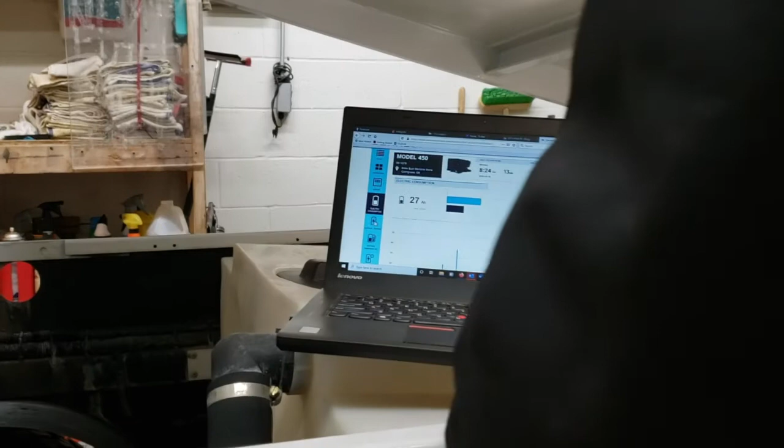Today we are going to be talking about Zamboni Connect. It's something that the Zamboni company came out with about 3 years ago and has captured the attention of a lot of rink personnel with what it can do for them to make their life easier by utilizing it, giving them the ability to be off-site and yet still monitor how things are going with the machine's performance and operation. Zamboni Connect delivers data collected using sensors on your machine to a mobile and web-based application that displays and stores the information. Built for ease of use and to allow management insight into daily activities as well as historic data. Monitor trends and activity.

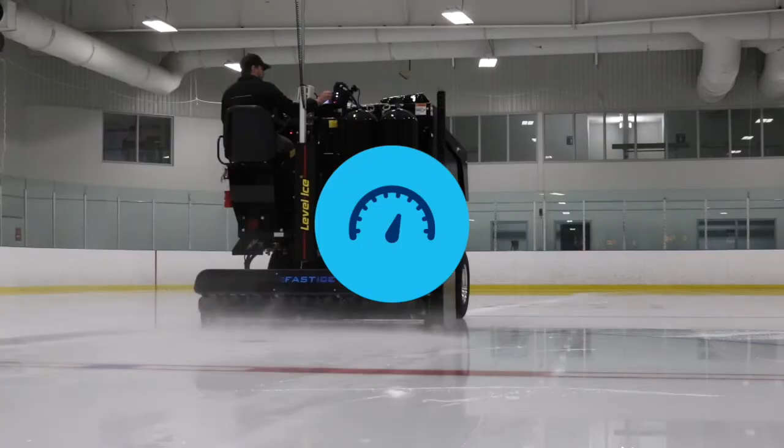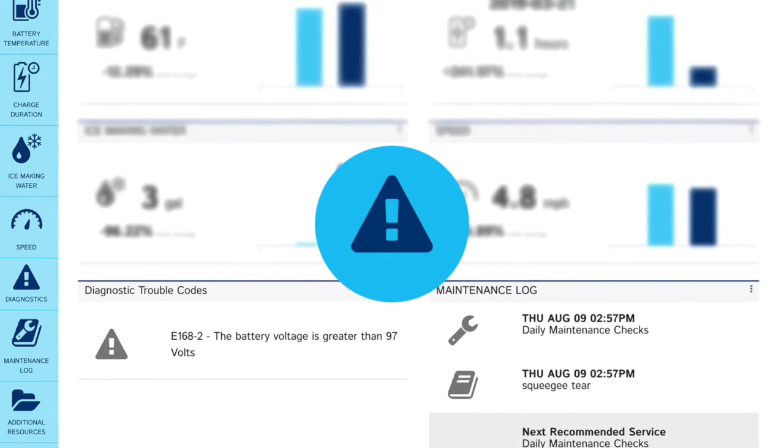Ice making water use. Speed. Maintenance activities. Energy consumption and battery performance of electric powered machines. Fuel consumption and engine performance of fuel powered machines. Diagnostic trouble codes via online or mobile alerts.

Zamboni Connect lets you listen to your machine. It provides a place for your team to collaborate. Let's rejoin the conversation with our team describing how the Zamboni Connect system is helping facilities with new access to data and training tools to optimize your machine's performance and longevity.

When my dad was working for the North Stars 100 years ago when I was young, they didn't have the technology that we have today that might have, if it was available back then, enabled him to not have to spend as much time in the building. He would have been able to monitor things like the refrigeration system, different aspects of the building, and the ice resurfacer. And that's really what Zamboni Connect does.

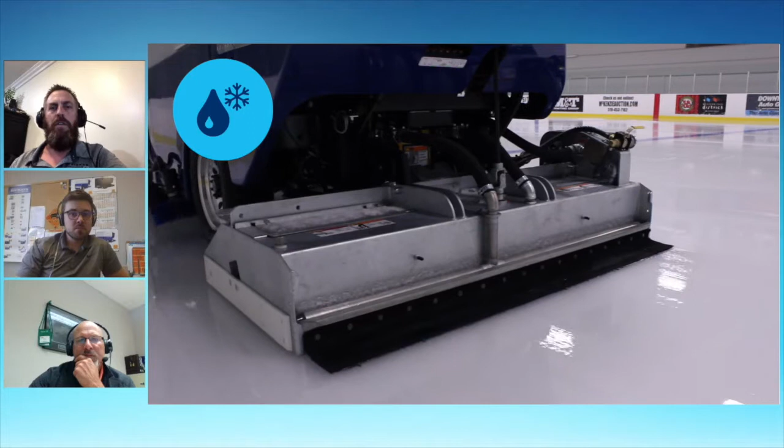I talk to our customers and let them know that they can be sitting at their cabin, as they refer to it in Minnesota, or the cottage up in Canada, and sit on their deck and have a barley pop and be able to tap in and see how things are going with the machine. They can see how many gallons of water got put down the last resurface, how much time they spent out on the ice, how fast they were driving.

And one thing that I've got from you, and I don't know if you want to expand on that a bit, is the training aspect of it. That's something I hadn't thought about when I initially started promoting this product to customers, but I think Matt, in his conversation with us, talked about how they did that with training their operators with the Connect product.

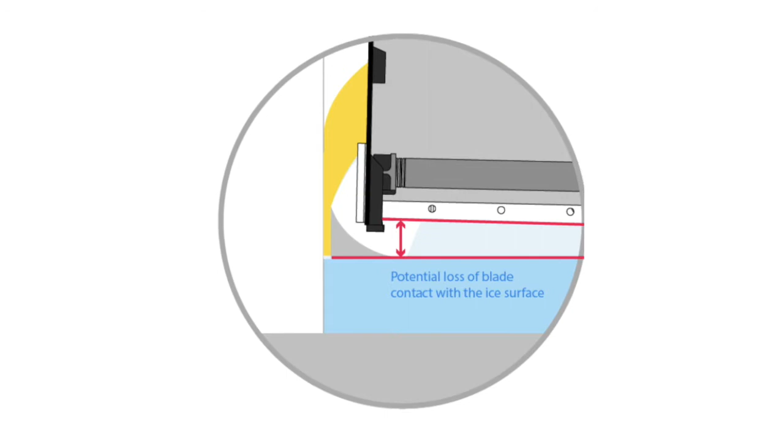Yeah, and that is one of the big selling features of the system, because you go into rinks, you and Scott, you guys know this. You walk into a rink and you see the bowl effect, and you're going, okay. And this would be on a Monday. In most cases, the experienced operators usually work days during the week, and the part-time operators are working on weekends that don't have enough seat time. So it allows, without pointing fingers, the system allows management to understand, okay, who's been on the machine, and let's take a look at one category.

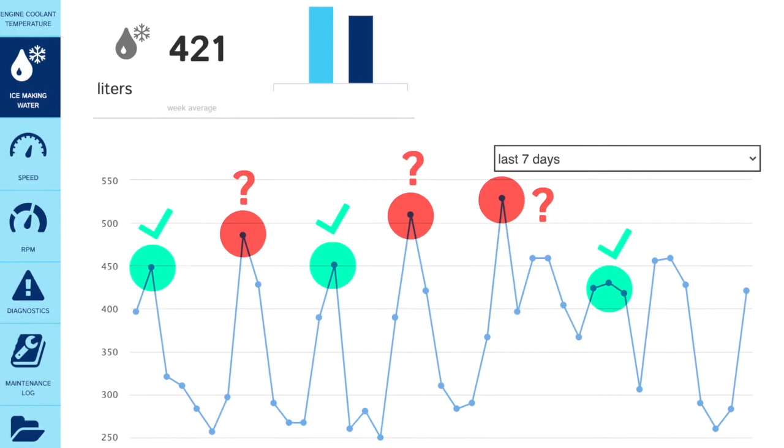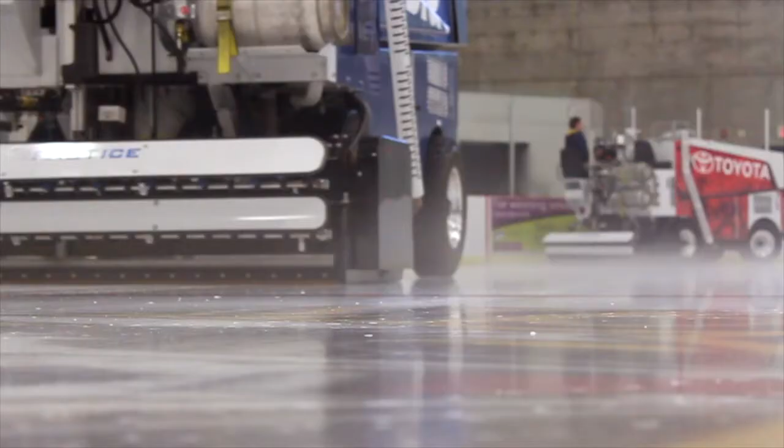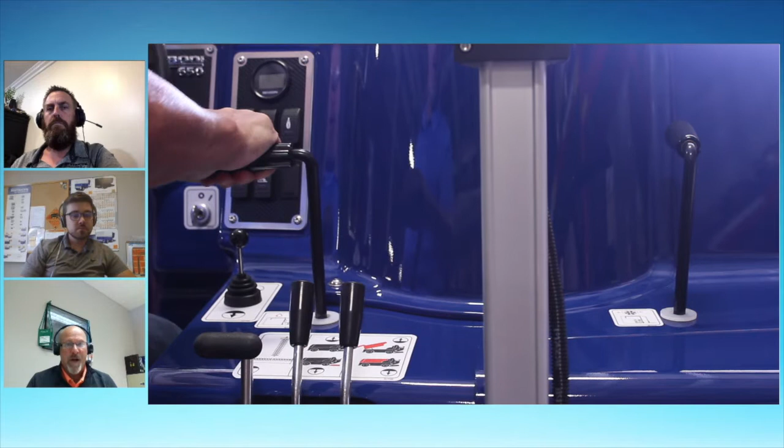Let's take a look at the floodwater usage. If they're doing a 7-minute flood and they're putting out 180 gallons based on the machine, well, something's not right. There's a disconnect there, and that's a training issue. Most times, I'm looking at floodwater usage, and it's always high, unless they're building their ice for an event or something, I get it. But when I'm training operators out in the field, at a single pad, maintaining 1.25 inches of ice, you only need to fill your floodwater tank up halfway and open up your valve halfway, and you're maintaining what you're cutting. And so it's a great training tool. And management, they look at that and they're going, wow, that answers a lot of questions.

And the operators, they'll go, well, Big Brother's watching me. No, Big Brother's not watching you. What we're doing is trying to make you better at what you want to do and what you are doing.

Yeah, I think it kind of goes to pretty much anybody can be a driver, but not everybody can be an ice maker. And I think this tool really helps the people who want to perfect their craft and know what they're doing. And the younger generation, like you, Scott, are into this technology and something that you guys are all used to. So maybe you can let us know what you see or hear from your age bracket.

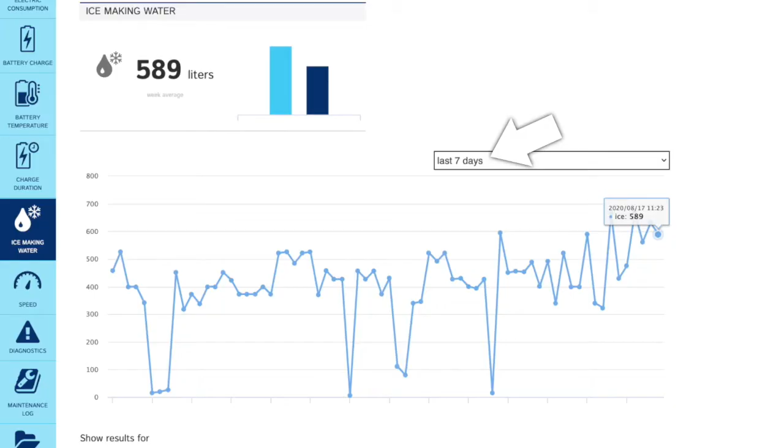For training, it's really beneficial to show operators data or a visual graph of how much water they're using. If you just tell someone to lay less water, maybe they'll turn it down a quarter or a half, but maybe that's still too much water, or not enough for a good flood, especially on weekends when the bowl can build up. They can look at the data and incorporate that into their training.

For staff and management, they're able to see, based on flood time, who is driving the machine, and if that particular staff member might need more training, or maybe they're not listening to the training. Having the visual data can show them, this is what we're doing, this is what some of your other coworkers are doing.

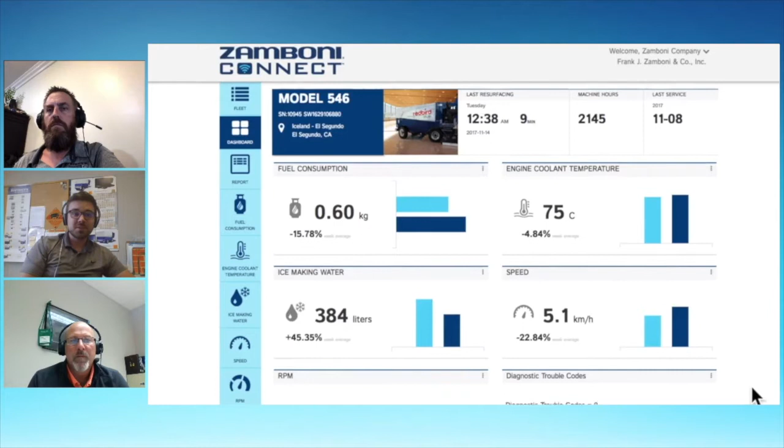It builds into the facility's bond of making a good sheet of ice. Doug and Marty could work the weekdays, while others work weekends, Friday nights, putting down all kinds of water in the corners, and then the weekday crew has to cut those corners down Monday morning. But if we could see the data, like, this is what these experienced guys are doing, I'd want to operate the machine like them, I'd have a visual representation of what to strive for to make the best quality sheet of ice.

Down here in the States, depending on the part of the country, you can have a hockey association that runs the rink, and parents of the kids using the facility have to donate time, and some of those end up being operators of the machine. They might drive it only 2-3 times a month, and this tool is really going to help them.

It's another selling point I bring to people. If you've got 10 drivers, which might be light for some facilities or too many for others, and 8 of them are doing the pace and flood amount you want, but 2 aren't, you can bring it to their attention and say, hey, this is what we're trying to achieve.

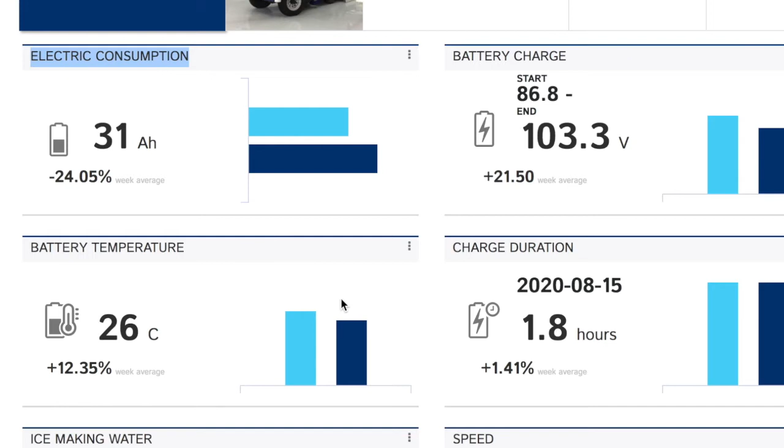I'd think, Scotty, with guys your age group, they might be so in tune with technology that when they come off the ice, they want to back up what they believe, saying, hey, I did a good job on the ice, let me check, and they can check the data from Connect to see if it verifies what they believe or not.

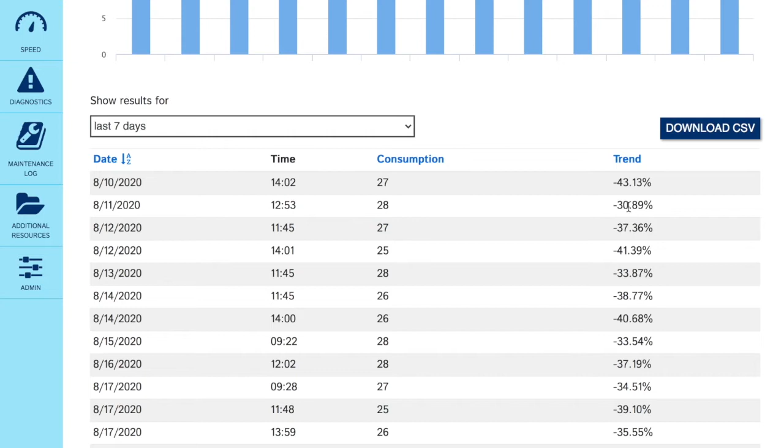Just to take it a step further, I'll give you a real life situation back here in Ontario. A customer with Zamboni Connect reached out to me last year complaining that their ice was wavy. So troubleshooting with them - dull blades, down pressure, checking all that - everything was great. Then I asked, is this all the time? He said, no, it's just on weekends. We come in Monday and we've got wavy ice.

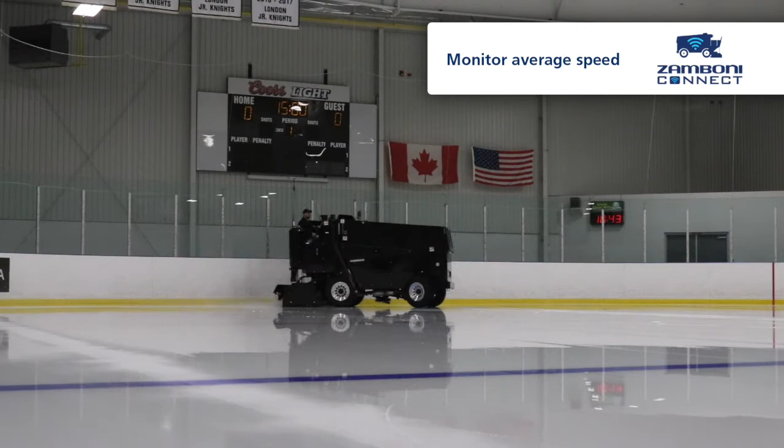So I checked the machine, and the operator working that weekend - not every weekend - was doing a 5-minute flood. If you're doing a 5-minute flood, you're probably going about 8 miles an hour, when the average speed should be about 5 to have the machine do the proper cut. If you're going too fast, you could end up with wavy ice.

So we identified that operator, and it makes sense given they're busy dealing with dressing rooms and customer service and all that. So we reached out to the operator with the manager and said, just showing you this and letting you be aware of what's going on and the effects of driving too fast, what's happening to the ice.

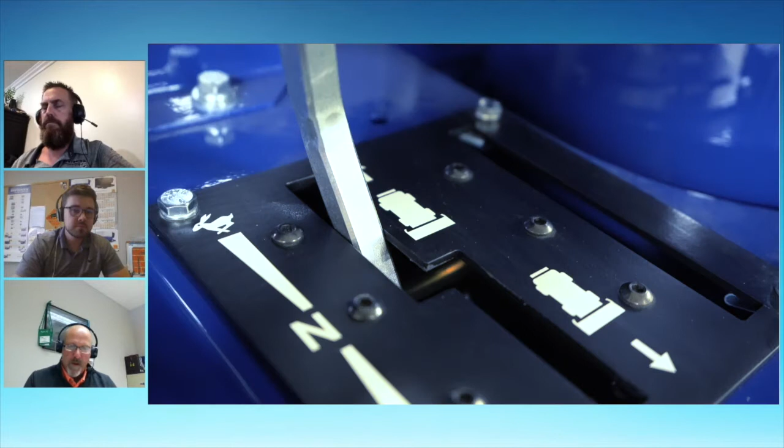That's about 5 miles an hour average, and he drove that speed the whole time. Perfect sheet of ice. There you go.

Not having Zamboni Connect, not being able to identify issues, they could have gotten into expenses of fulcrum arms and all bushings and all those different things that a lot of times are the case. But we just identified, because of Zamboni Connect, one operator that was driving 8.5, 9 miles an hour. So it was a definite benefit.

One other thing you were mentioning is having the immediate feedback of knowing, Doug, you could say Scott, turn down your water, and maybe you're outside the building and I'm like, okay, maybe I'll turn the handle down this much, but what does that equate to? How many gallons less am I putting down?

So by looking at my floods, I'm able to determine that if I turn it a quarter, I'm using, let's say, 50 gallons less. Or let's say I'm filling the hot water tank all the way to the top and I'm only ending up using half of the water by the end of it. By the next time I'm doing my next flood, that hot water is now cooled and it's not going to lay the best sheet of ice.

So using the data, you get immediate feedback and really start to see the importance of resource management. If I'm heating water to make ice and then just dumping half of it down, I'm able to see how many gallons of water, or make a quick math equation, but it's very quick to see how much money you can save with proper training and understanding what the machine does. Just the visual of the data and the immediate feedback is a great help, because you can tell me drive slower, how slow, use less water, how much less water.

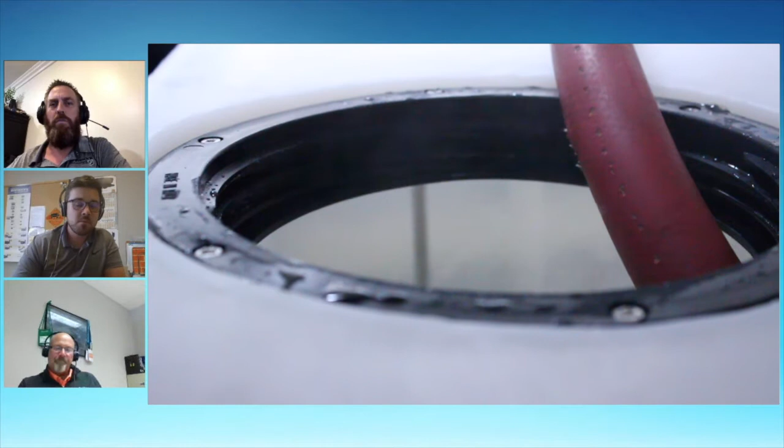Yeah, almost a science. And I think one of the things, if I recall correctly, or maybe it wasn't the guys at Ice Den, but the water consumption. In our world, a perfect ice resurface would be putting down how much water you're shaving up. Now, the amount you shave up can be dictated by how much surface snow is out there by the user group, or how much ice was lost via evaporation.

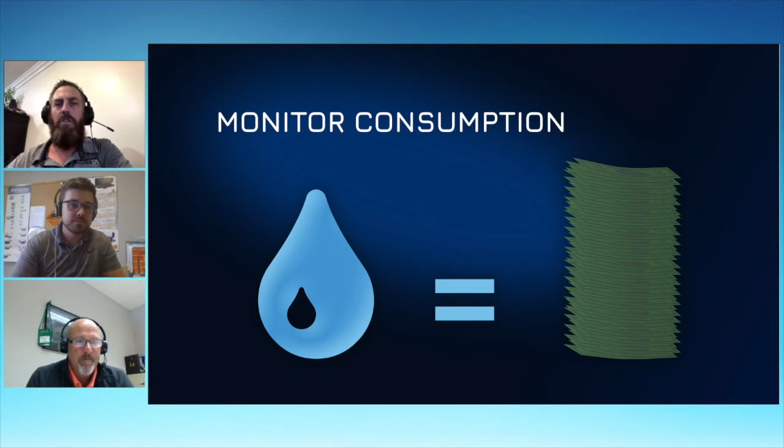But with water costs getting more and more, and living out here in California and having to go through the drought that we went through that finally ended a few years ago, the cost of that water, it's not just the water. Most places tie their sewage rates to the water. So for every gallon of water that you're putting on an ice rink, they think that's going down the sewer pipe, and you're getting charged for that.

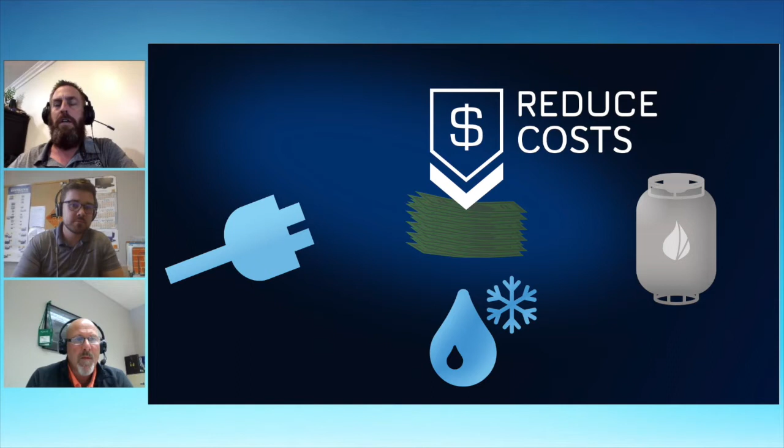So this is a great opportunity for people to better monitor what they're putting down, which should translate to a more consistent ice surface and lower energy costs. So I think now with operators having less time because they've got other cleaning stuff they're having to do, and the cost of everything, this is going to help them save money in their operation and return on their investment, which is not a very expensive feature.

Let's talk about dashboard. Every new machine that leaves the building, whether they decide to have Zamboni Connect as a full package or not, they still have access to dashboard. Maybe Scott, you can talk a little bit about dashboard and some of the features of that part of the system.

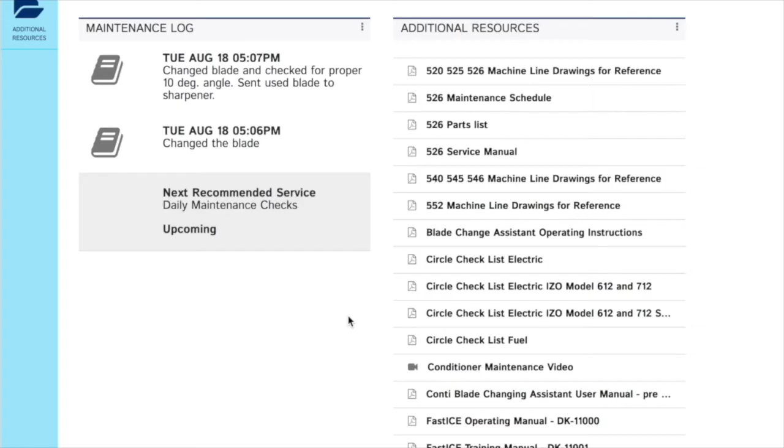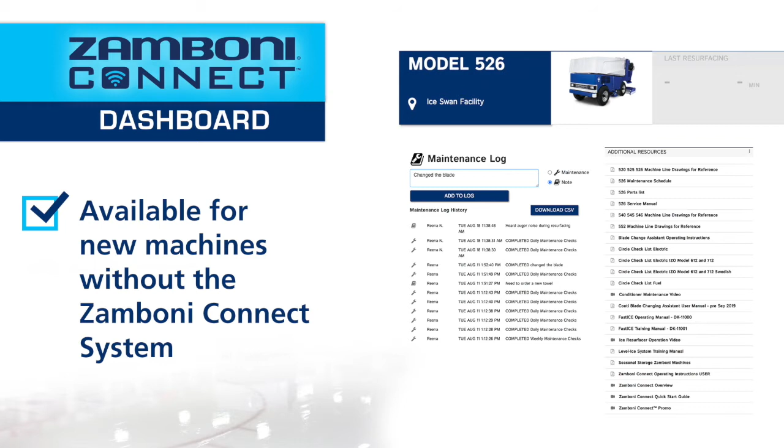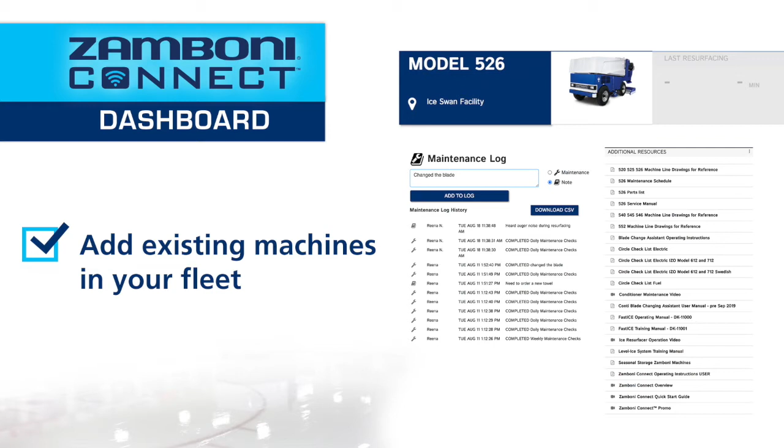Yeah, so the dashboard allows customers to have all of their manuals in one place. Instead of having the paper manual, you can have all your parts books, your service schedule, fault codes are all listed there, so it's quick and easy to find. It's very important to have things in a central location where they're accessible, whether in the facility or at home. They're available 24/7, anywhere with an internet connection. You can hop on and pull all the information on your machine, as well as there's a few notes.

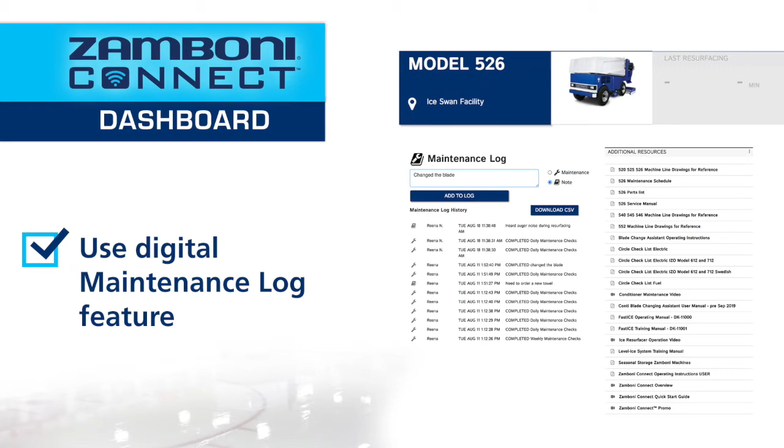So let's say I finish a flood and I notice that there's some shaking in the auger, and you come in, Marty, and you notice that shaking is no longer there. I might not have been washing out my augers, and that's a quick little diagnosis for what I thought could have been an issue, or if it continues, we know we're on it and can get that rectified quickly.

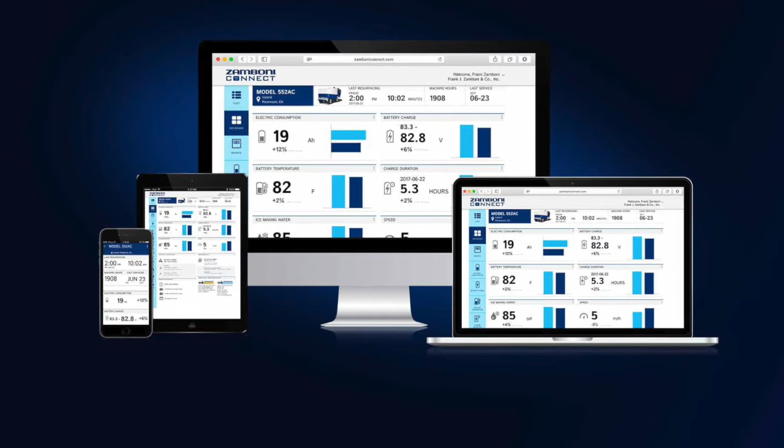The communication capabilities of the dashboard amongst the operations team, management, and fleet are huge, especially about actual mechanical issues with the machine. If fleet is a sub user or primary user, they can see that and be proactive, so costs aren't rising because people aren't paying attention due to urgency. When you don't pay attention to things, other things start breaking mechanically as well.

That's one of the things I've talked to customers about with Zamboni Connect - I strongly suggest they get a tablet for their surfacer room dedicated to Zamboni Connect. They can spend money on an iPad if they want, but there are less expensive tablets out there that will access the information. Hopefully what you do is get the operators into the practice of recording the information, and it gives you electronic data to have available.

That's something I recall from our conversation with Matt and his guys at the ice den - their ability to record that information. We also use the maintenance log section to record anything done to the Zam, whether it's a blade change, a grease, an impeller, or even anything to do with the engine that our mechanic DJ with gearhead equipment might do. So anything that gets done all has to be recorded in that maintenance log, which has been great.

All that before was all on paper. We still have one machine in each building that is not on Zamboni Connect, so those still have paper, but we still tell the guys, if it says on Zamboni Connect that maintenance needs to be done, you have to do it to the other machine as well, and then you still have to log that it was done to that machine.

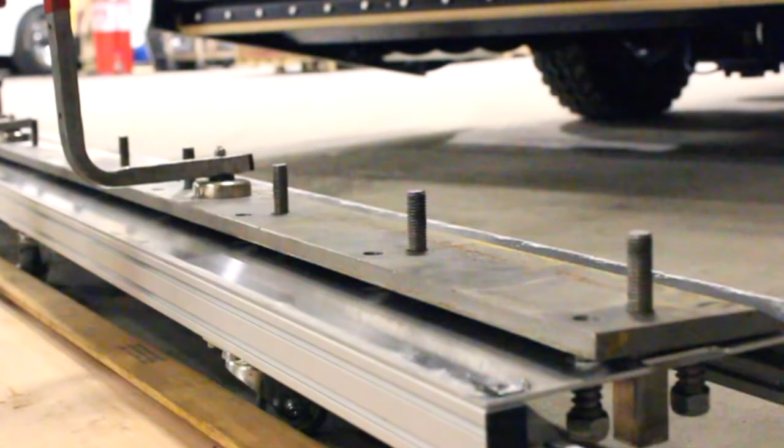Scott, you've witnessed this when I've been in facilities and training. Changing a blade, best practices, SOP to change a blade. Where are they documenting everything? If you're doing best practices and changing a blade, you're measuring the width of the blade.

Are you documenting that? The rotation of the blade on a 4-week rotation, are you documenting that? All this information can be put in the log so management knows when that blade was changed, who changed it, what the width of the blade was. It comes back to expectations, but it's backed up. There's information people can read and look at, and if used properly, it allows.

If you have to troubleshoot, going back to troubleshooting an issue with the ice or the machine itself, having that documentation available to all people involved takes that troubleshooting, if you will, from here, maybe back to here. Prime example, what the fellow was doing, our customer driving too fast, creating wavy ice.

So yeah, it's definitely a bonus. And like Scott mentioned, all the manuals and training tools available on there - how many different manuals and training tools are available, Scotty? Pretty well everything you would need at home and in the facility. You can do a lot just by looking at the books, and anything you traditionally do at the facility can now be done remotely, and it's a great feature that helps everyone in the facility get on the same page to put the best quality sheet of ice down.

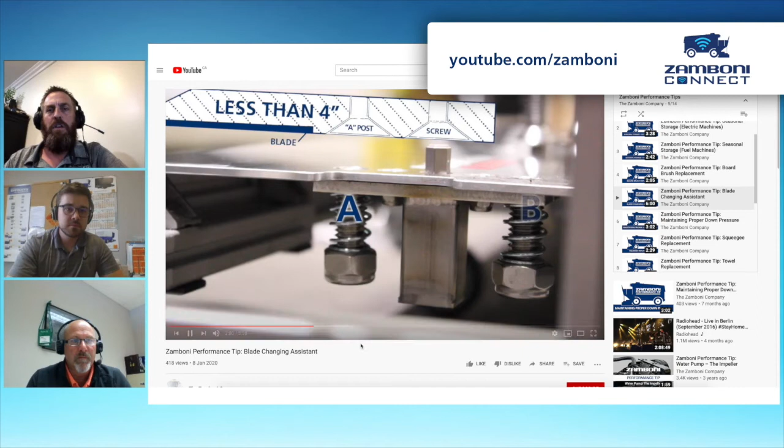And I know, again, Scott, your generation is striving - they're looking for that kind of information. I think they expect it from suppliers nowadays. Oh, definitely.

Well, for instance, this past weekend I sharpened my lawnmower blade, and then looking up how to properly balance it, the first thing I did was go on YouTube, look up how to properly balance my lawnmower blade, and attached it with no issue. So whenever I'm questioning something, or don't want to attach it incorrectly, I just want that little verification of how you're supposed to do it, getting that from the manufacturer. I think it will help a lot of customers, especially young or newer staff who want to learn how to change the board brush or the wash water pump.

There was a long time where the knowledge didn't always filter down, but now we're building it up from the ground, and it's going to be readily available for anyone who wants it or anyone looking to further their development.

Have you got any customers in the States that have had their machines post-sale have Zamboni Connect retrofitted yet? We have, we've had a few. As a matter of fact, one of our dealers down in Florida, Dave Westcott, installed a couple of the systems on machines for the Nashville Predators. It hasn't been an abundance of that - we have not gone back in time to do it to other machines. It's something we're taking a look at.

I think one of the things you've been doing a lot of is getting people hooked up to dashboard. Maybe you can explain a little bit more, Scott, about how a customer who maybe has older machines can reach out to us to get hooked up to dashboard so they can experience some of that. You want to take that one, Scotty? Sure.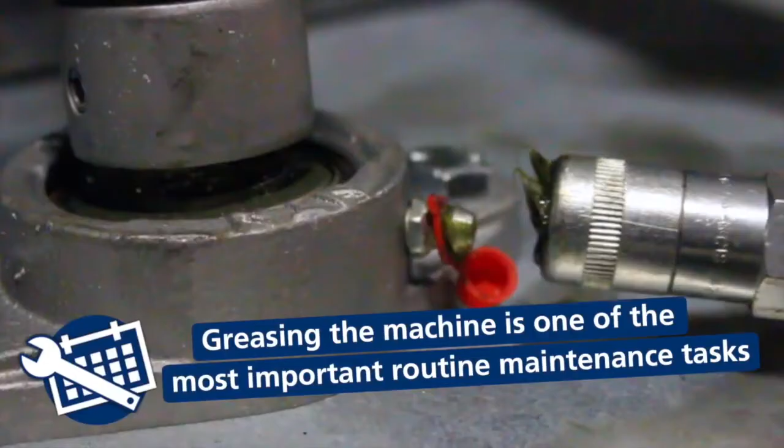One thing I wanted to touch on, Marty, that you brought up, is that sometimes facilities down here in the States have their fleet department working on the machines. It's a little different down here than up in Canada. It can become a game of telephone tag trying to get the rink manager to reach the fleet department, and the fleet department trying to get back to the rink. This system can send a notification to the fleet department, or they can monitor how many hours are on it, so they can say, hey, I need to schedule this. I'm approaching 150 hours and I know I need an oil change, or I'm approaching 50 hours and I know I need to do this. They can look into the machine and not depend on the rink manager being on vacation or whatever the situation may be. It helps them do a better job staying on top of maintenance, which, as you stressed, is really important for customers to know, because staying on top of preventative maintenance reduces the expense of taking care of something that didn't need to break.

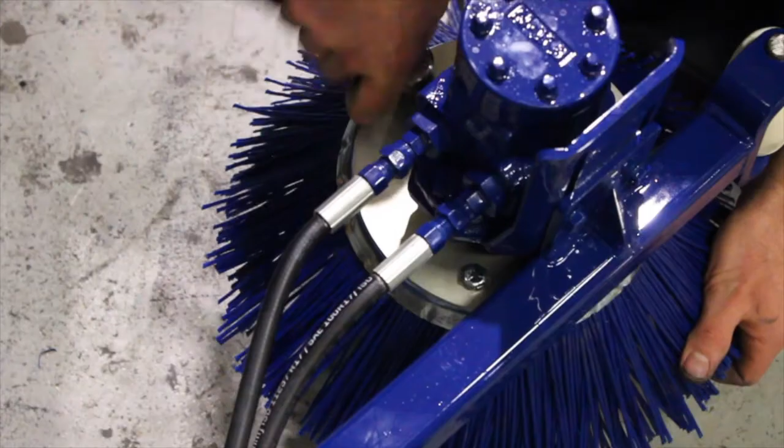I'll speak to the City of London, 14 machines. The fleet department owns them and is proactive with the machines. Barry Galloway for the City of London can look at those machines anytime he wants, and he knows exactly what's going on, what service has been done, and he can communicate with the arena managers or park and rec director to carry it through. So it's a great communication tool as well.

Marty, I don't know if you want to touch on the different modules that are available for data collection, to let people know what's out there.

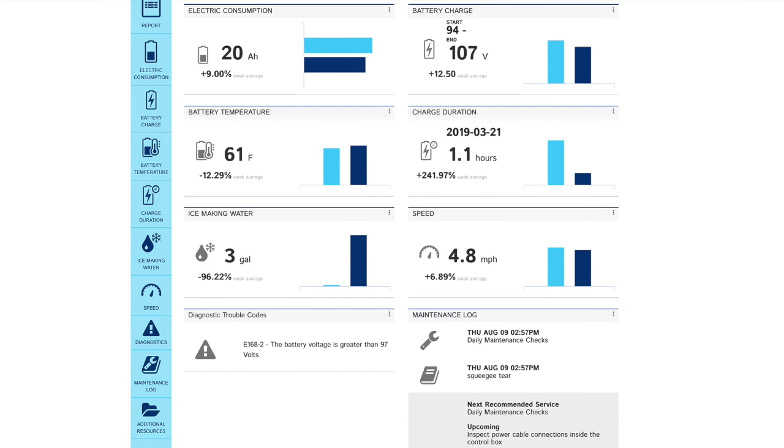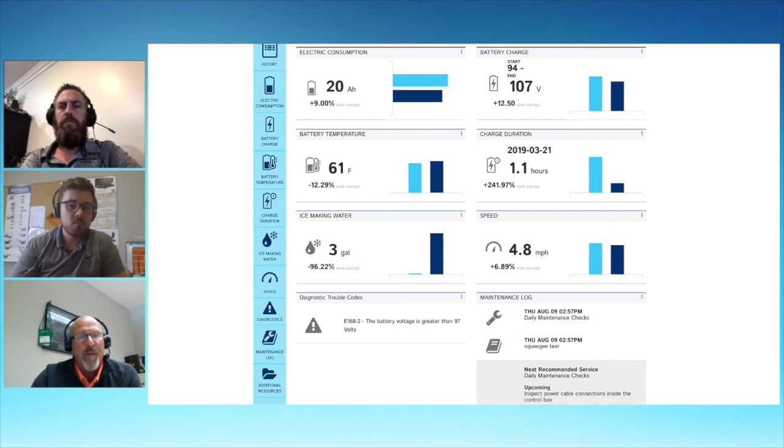I'll pull up the modules themselves on an electric machine. It'll identify electric consumption, battery charge time, battery temperature, charge duration, and then the typical ones on both electric and fossil fuel: ice making, floodwater usage, and speed. Then there's diagnostic trouble codes and your maintenance log - that's on an electric machine. If you go back to a fossil fuel machine, the modules are fuel consumption, engine coolant temperature, floodwater, speed, RPMs, and diagnostic trouble codes.

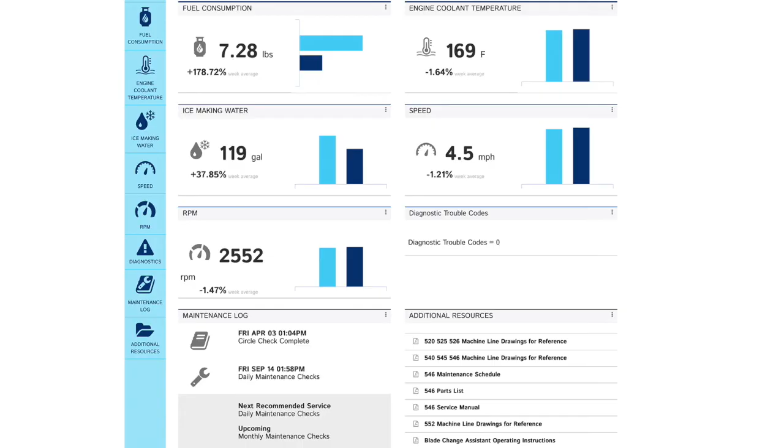With those codes too, Marty, a fault code can be sent as an alert to the fleet or whoever is on the admin side, so they know what's going on. We can get that information as well, and work with the customer to help them through what might be a small thing that could eventually become a big thing. That kind of data collection is important in helping the customer understand what's going on with the machine, and get it back up in operation as quickly as possible.

I know since Doug first started with the Zamboni, we've come an incredibly far way in terms of what technology is on the machines. Last time we all got together, we talked about the history of the electric machines and just seeing how far they've gone. The machine information used to be contained in the little ice resurfacer room on the machine itself. However, now you can access it anywhere.

If there were any fault codes that we were just talking about, those are accessible via alerts or by signing in on the web app. So it's no longer just contained to the ice resurfacer room to understand the machine. It's now almost global, you can see how your machine's doing from anywhere. Maybe it's for monitoring, training, resource consumption, or savings. The list of tools is virtually endless. As the technology continues to grow, it will only improve, and the customer experience will get better and better. The more feedback we get, the more we implement. It's exciting to see where it'll go and just how far the machines have come, and exciting to see what the future brings.

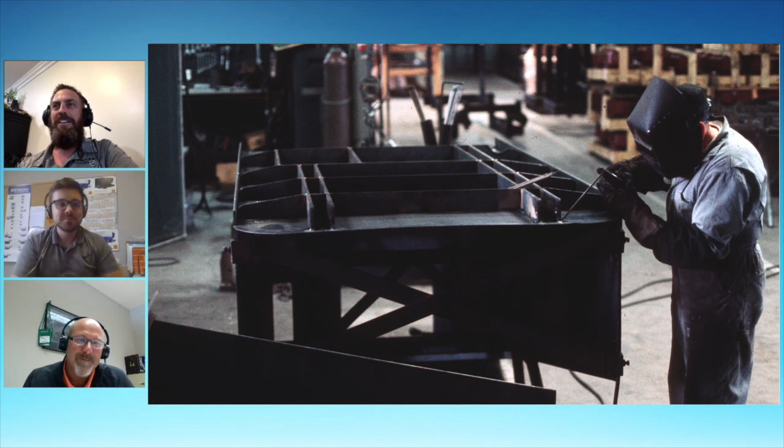Hey Doug, by the way - yes sir, happy anniversary. Thank you. 33 years. For our listeners, I'd say you're outside of the Zamboni family, probably in the top 5 of tenure, no? We had one of our welders retire, he'd been there since '69, retired within the last year. Richard Zamboni is #1 in seniority at the plant in Paramount, and then Donald and I are neck and neck. So it just means I'm old, Marty, a dinosaur.

Going back to Scott's comment - I think we're not using paddle and chain anymore on the full size machines, just on the 100s and the 200s. But you've come a long way - I was going to say, was that the Type J model when you started? I had to throw one at you. That's okay man, I lob them at you all the time. I appreciate the comebacks - you've got to have thick skin in life, that's the way I look at things.

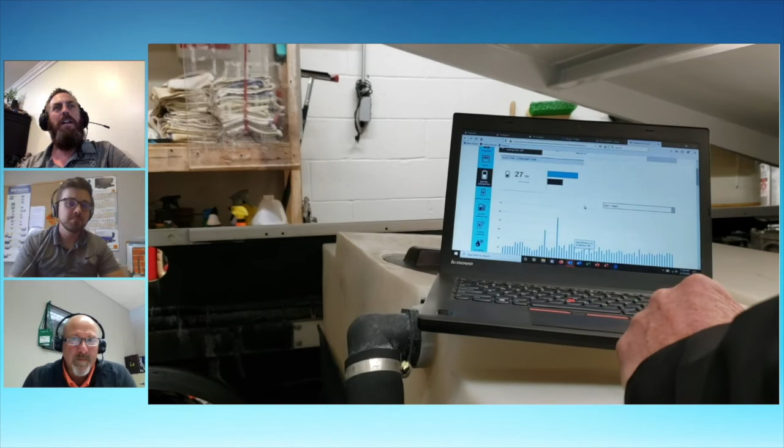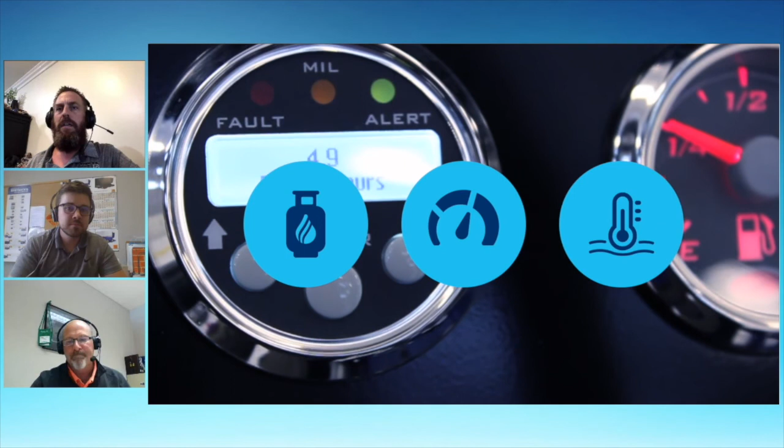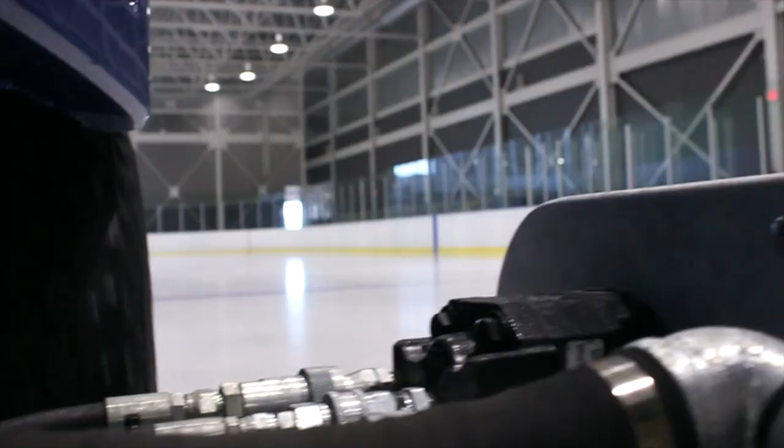I think if people take a look at this product, when I tell them they can access it from outside the building - operators and drivers, don't view this as Big Brother trying to point out your errors. Look at it as a tool that gives your bosses the ability to see what's going on in their building, because what everybody's selling to the user groups isn't the nachos, the popcorn, or the hot chocolate - it's the ice surface. As Frank Zamboni said, the product we have to sell is the ice itself. If we can provide you tools to better do your job and better monitor how the machine's working, that's a success for us, and hopefully for you, making your life and job easier.